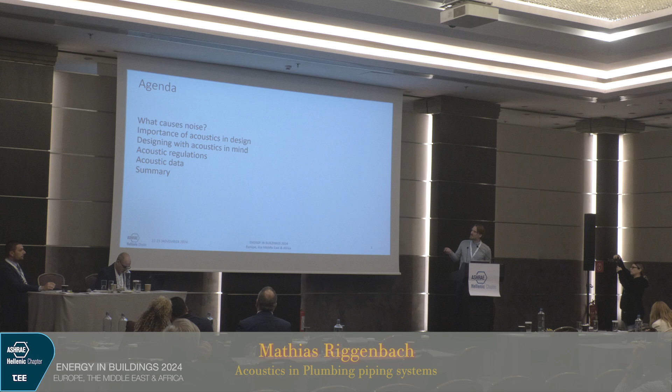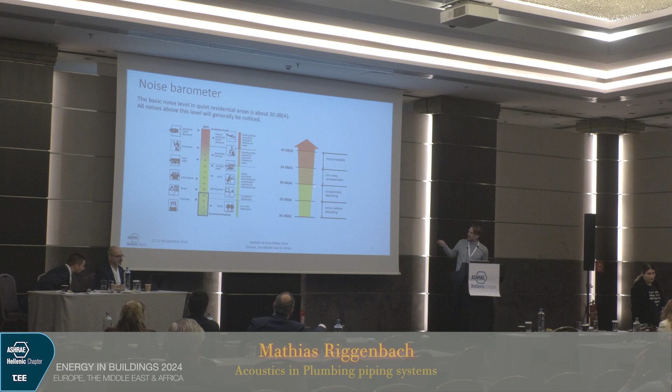I go through the agenda quickly, we'll talk a bit about the basics, and then also we'll go into the acoustic regulations, acoustic data, and have a small summary at the end of the presentation. So maybe as we talk here much about HVAC systems, just to remind about which decibel level we are talking here when it comes to plumbing noise in residential houses, offices and so on. We talk about levels between 20 and 30 dBA. So I guess this is a bit different to the HVAC system, which normally is on a higher scale. So here we concentrate really on levels below or on 30 dBA.

Also, we talk much about the airborne and structure-borne sound. So in the installation room, where we have the toilet, of course we have airborne sound. So if you flush the toilet, we hear the toilet. This is also needed, so we know the toilet works. And the regulations are not according to your own room or your own home. You should not get disturbed by your own flushing of the toilet. Otherwise, maybe you should go to the doctor presentation, you have some other problems. But what is important are the other rooms, so the neighbor rooms, of course not your own rooms.

And then we talk mostly about structure-borne sound. So sound which is going over the structure of the building, especially when we talk about solid installations, so concrete blocks and so on. And when it really goes to acoustics, we are talking mostly about gypsum walls, about lightweight walls, to really make sure we do not have any acoustics traveling to other flats or offices.

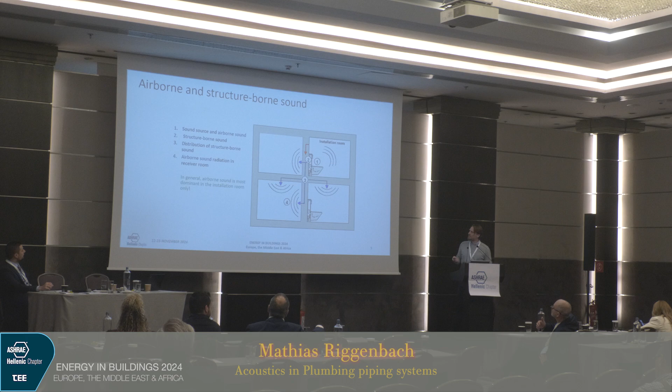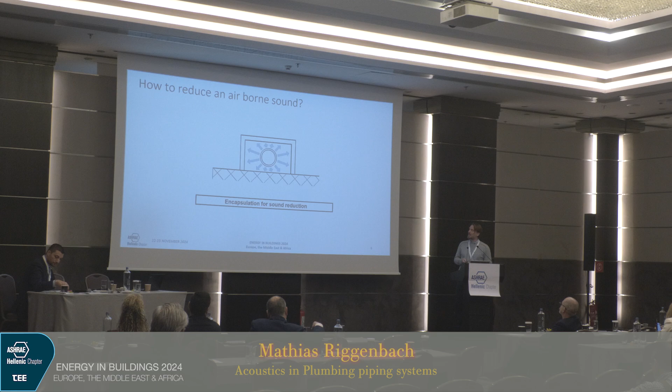How to reduce airborne sound? I think it's quite easy also. We do encapsulation, so we have all the ducts, so mostly anyway the drainage pipes, they don't look so nice. We put them behind ducts, but the main reason is to really keep the airborne sound out of the room, to make sure all the sound produced is not spreading as airborne sound in the toilet.

Then as well, for the solid-borne sound, we have the special brackets. So I think the same on the HVAC system, we have this rubber on the channels which you connect, and you decouple all the installation from the building. And this is actually the same in the plumbing industry. So we really have to decouple all the devices from the building. I always say all the installation should be like floating inside the building. It should never be fixed to the building itself.

Because then we have the big problem of this solid-borne transmission of the sounds. So I'm sure everybody knows if you have, for example, a heating pipe, you hit it on the first floor, and you have no decoupling, no rubber brackets, then you will hear it even from the first floor to the 10th floor. And exactly this we want to prevent.

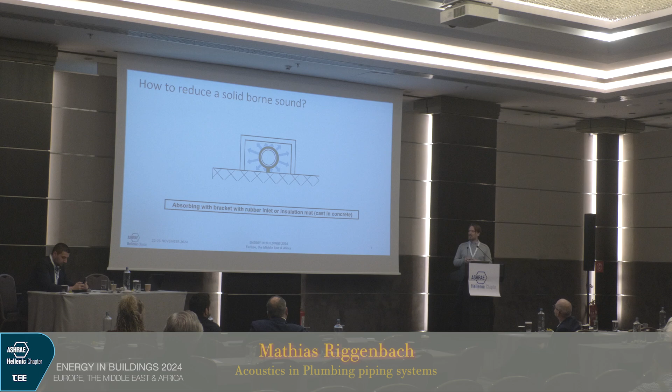Also, what we use in practice, we use in Switzerland, we put the pipes in concrete. It's very special to Switzerland, to the Netherlands. In South Africa they also do it, so they use the HDPE pipes in concrete, and also there we have of course to decouple it, and we do this with the rubber mats. We use the same as a bracket to decouple it from the whole environment.

So what is mostly happening in reality, wastewater noise is neglected in planning. So as well here, if you don't do proper planning, you will have many problems later on, and then it will be very costly to change them. Once you have something behind the duct or even inside the concrete, the pipe, imagine you forgot the insulation, you cannot just put it afterwards. There's a very costly way, with the compressor machines, which you have to use, and this of course is very costly. Or then also the people, when they realize the sounds they are already living in, they will have to go to a hotel or somewhere else to make sure that we can make everything right.

Of course also the pipe is important, but I would say the pipe is maybe 10 or 20% of the whole problem. I will show a bit what you can do to really make sure you get already a good acoustic insulation without using even expensive material.

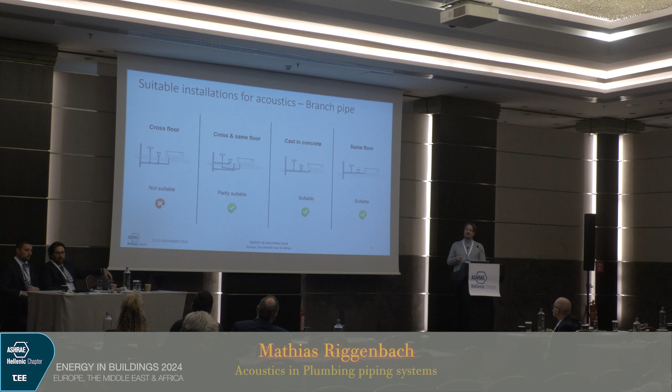So also installation habits are very important. So already there, if you do a proper planning, a proper installation, you can prevent already a lot of acoustics going to the neighbor flats.

Also here, for example, what is done many times wrong, we have installation of a toilet directly to the wall of a sleeping room. Of course, here there are no regulations in your own home, but it's also pleasant when you have a nice installation in your own home. And if you have it to the neighbor, then it's even worse. So we try mostly to do this to the staircase or to another room, which is not relevant for the acoustics. And then also here, for example, a duct which we produce.

So always when you do a duct, actually we increase the noise. You all know, if you are in a smaller room... Here in the big room I need the microphone. If you are in a smaller room I don't need any microphone. We increase the sound. So also here, just with insulation on an L-shaped base, we can break the noise and already make it quite a good acoustic installation.

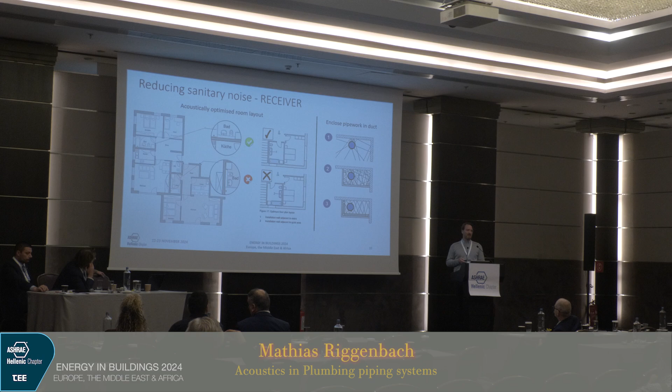So also you see here, planning is crucial when you talk about acoustics. I think in the ASHRAE installation it's exactly the same. So if you do a good planning, a reasonable installation, you can already get very good acoustic results without using expensive pipes or other devices.

Then also the different room types. I spoke already a bit. For example, all the toilets: for a good hydraulic installation, you have the bathrooms on top of each other. And there are no values regarding acoustics to the neighbor bathrooms. Normally in the bathroom you are loud, you're doing something, and then the noise is not really important even in the neighbor's bathroom.

Of course, your living room and especially your sleeping room are the critical rooms, and there you have to take care. So you see here, we always have to think three-dimensionally when you talk acoustics. Because your own rooms, again, they do not matter; well, they have some standards I will show you, but mostly for the general acoustic standards, there's no rule in your own rooms. Of course, if you really want to achieve high acoustic insulation, you can also request this.

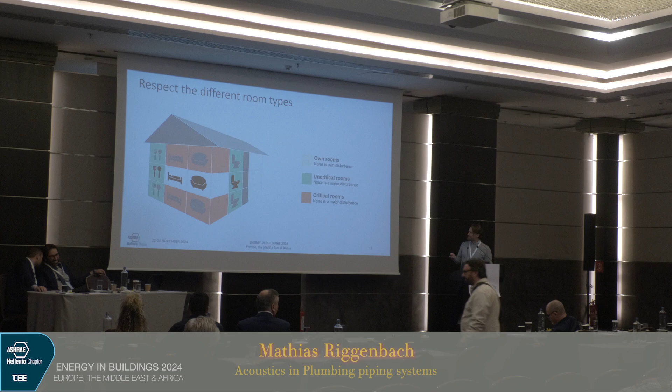Then, what should be used, mainly in the plumbing industry. As I said, people always think about the pipe, so I will show you some examples, some standards which are only about the pipe. But what is important, we always have to think about the whole installation wall. So all the devices which belong to the plumbing have to be considered to do a good acoustic installation.

So as I said, all this wall here is a kind of a pre-wall. You see there's an insulation here, and it should be detached from the normal wall. And this also helps for the statics. Sometimes they use this wall, they break it, they put the devices inside, so it also has additional benefits on the statics of the building. Especially on new buildings, building walls and breaking them afterward doesn't make too much sense. So working with a pre-wall also makes sure you get the best acoustic results.

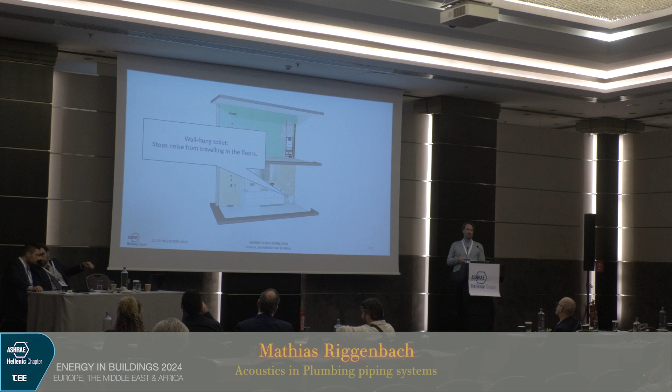As well, the wall-hung toilets here, as I mentioned already, are of course much better than a floor-standing toilet. You keep the noise in your own room and do not send it to the neighbor's room on the lower level. And of course, pipes are still important, but I would say if you have a normal pipe, you make a good layout and a good installation, and you consider all these points, the whole system, you will already get very good acoustic results. And if you really want to achieve the high results, which I show you afterwards, then you also need special pipes, special material, and a more special way of installation.

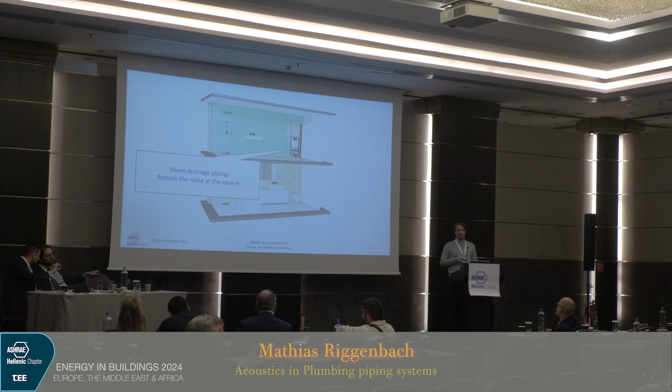Here, just some examples: offsets which we have in the pipe can create a lot of noise. For example, a 45-degree offset can already create +9 decibels, which is quite a lot when we talk about acoustics. If we go to a 30-degree offset, we have only 7, and if we go for a 15-degree offset, we are only at +5 decibels. So best is not to do any offsets, also from a hydraulic point of view, but more from the acoustic point of view.

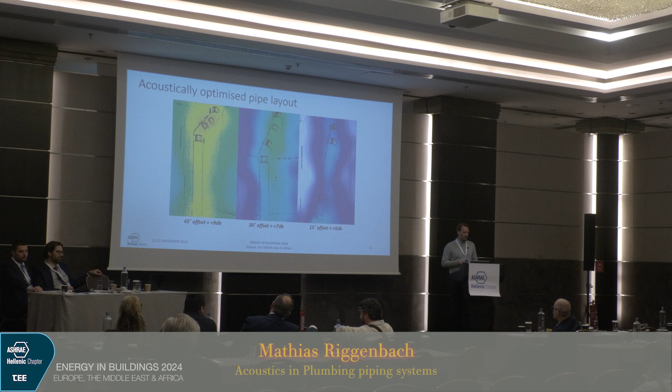Responsibilities, also a big point. Who is responsible for the acoustics in the building? There are the engineers, and of course the architect who makes the preliminary layout. So I always say the escalation is already starting here. If the architect makes a bad layout of the building, for all the others it will be very difficult to repair this bad design. And many times I see architects are not aware of all these measures they can take, because it was not really taught to them in school. And this is something I think is important on acoustics, to talk to the architects and show them how to do it right.

And maybe also to explain a bit how it started in Switzerland, why acoustics got important. It was mainly because of the insulation of the building. Again, I come back to the general topic of the conference, decarbonization, difficult word. We started to insulate and insulate more. I saw this morning the colleague showed an insulation of 6 centimeters. In Switzerland, already 20 years ago, we started to do 20 to 25 centimeters of insulation on buildings, because we could see that with this input, we can reduce the carbon output very drastically. Of course, there's a limit. We checked how much really makes sense, and I would say between 20 and 25 centimeters of insulation makes sense.

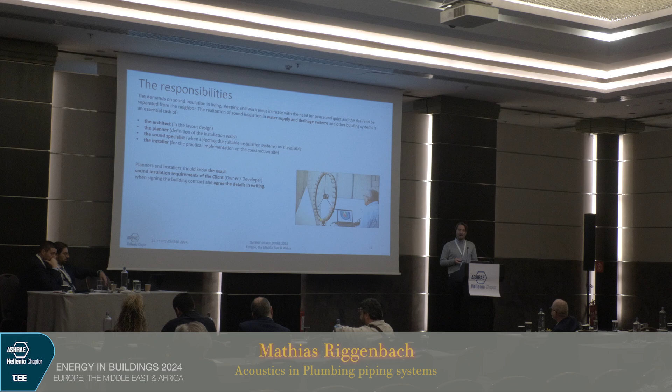And also very important, we all know, everything fails with the installation. If installation is not done well, you can have the best product, but if you don't install it well, all the benefits will be lost. So I see I have to speed up a bit.

So here I show you some standards. You see German standard, Swiss standard, Austrian standard, we have a UK standard. We have also in Israel a standard, but other European countries either use the German standard, which is mainly used also in hotels where it's most important. And there's the EN 14366 standard. And it's very important here, on these standards we define acoustic values within buildings.

So very easily said, when you are having a nice dinner with your family and the neighbor is flushing the toilet, we measure the acoustic value which you hear in your building. And this is what matters at the end of the installation. So this is important: I want to hear below a certain value, to have a comfortable life, to not get disturbed by the neighbor. I would say this is the important point.

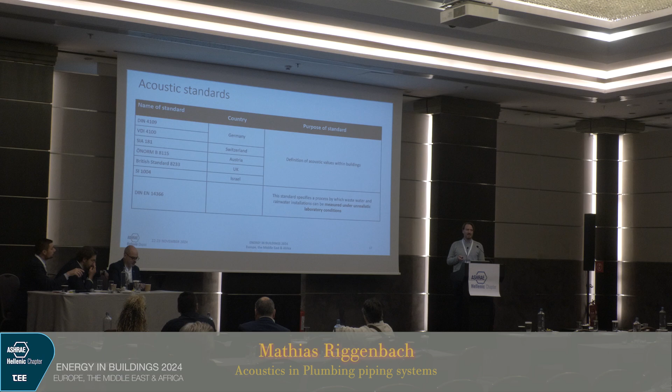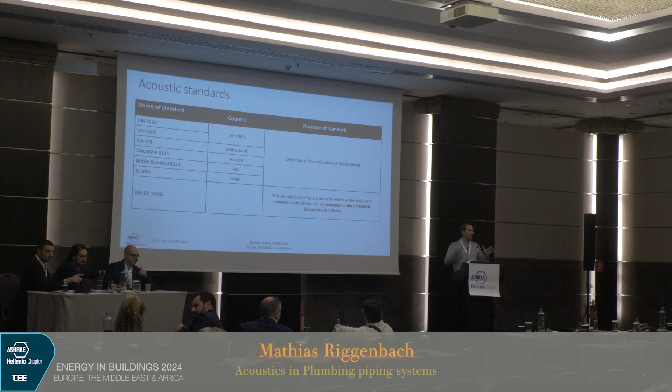Unfortunately, this standard, the 14366, is mainly used in the Middle East and African region. Here they measure some standard installation with wastewater in the Fraunhofer Institute in Germany. I'm sure you all know the Fraunhofer Institute. And this is more just to differentiate some pipes, so they only measure some pipes. It's not really an important value for the end user who is, for example, buying an expensive flat. He doesn't care what they measure in Germany somewhere in the laboratory.

Here, an example also of the British standard. Also here, it's not really much defined. We have, of course, values here from 7 to 23, then also in the night some other values around 35 to 40 dBA. But what you can read here, and what is a bit the missing part in most of the acoustic standards, it's not giving values for soil waste pipes.

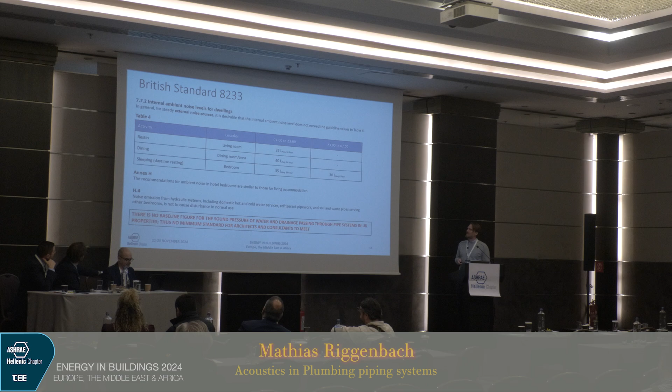You see here in H4, for example, it's only written noise emission from hydraulic systems, blah, blah, blah, other bedrooms is not to cause disturbance in normal use. So what is disturbance in normal use? Everybody has a different perception of disturbance, and that's why we need some regulation on decibels. We need exact values, not just some vague interpretation from any standard. So we really need to have this clear. So the British standard is a bit difficult.

I show you, for example, DIN 4109. Here it's clearly defined for living spaces and bedrooms. Diagonally, you should be at 30 or lower, for classrooms and office spaces 35 decibel A. And you see for rooms in the adjacent area there are no requirements. So this is the 4109-1, and then we have the higher levels for the 4109-5, where you go even to the lower level. This standard you have to apply in all the houses. This one here is optional.

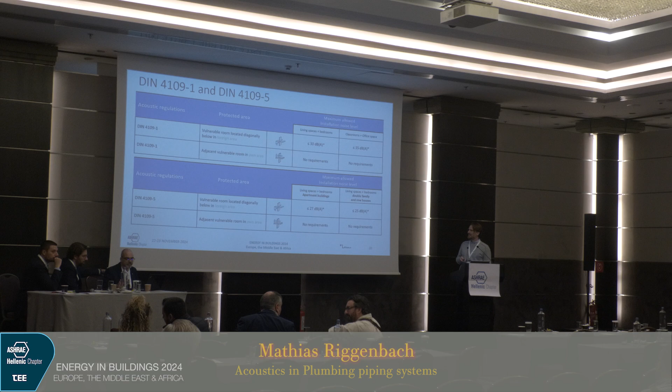If you say I build a very prestigious property, I want to take this into the contract, then you have to define these levels. So the DIN EN 14366, as I said, is more for defining installation of pipes. I will not go through all the points here, as there's no time. You see here in this institute in Germany, they put in the water on the second floor, and then they measure it 2 floors below.

So here we get really low values, even below 20 decibels, which are not relevant if you make an installation in this room here and then measure, for example, the diagonal noise. Also here they use some special installations and some very thick walls, and this is just not reflecting the reality. It's what they do in a laboratory, and of course you get some values, but they are not suitable for installation in reality.

So what should be done according to DIN 4109? Taking a real installation, flushing the toilet, the loudest device, and then measuring directly in the different rooms which are near to you. Because those are the values which are important when, for example, after you buy the flat, you make a measurement, you want to see this value on your measurement equipment, and you don't want to see any value from a German laboratory which was measured under laboratory conditions.

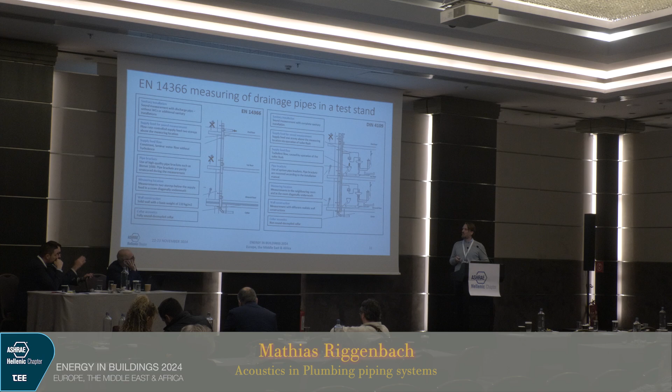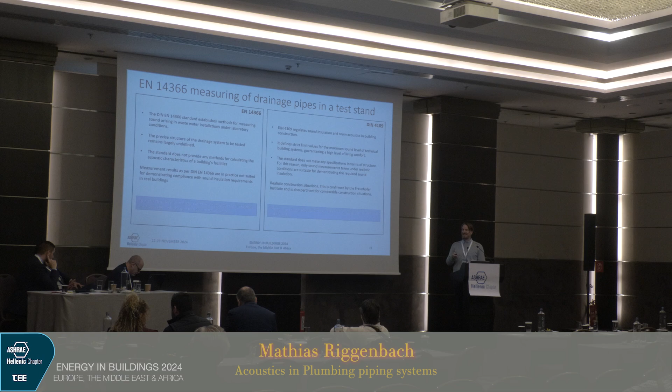So here is the difference. You see EN 14366 is, let's say, a cost-effective way of keeping customers happy, not giving them practical values. And then DIN 4109 is a rather expensive way. You have to build up many different situations, so it's not a predefined situation in a laboratory. Many different situations which you can have in your country, for example, build them up, making measurements, making certification, etc. So this one here, of course, helps the industry. This one here helps a bit to keep the cost low, which is not in the interest in the end of the end owner who buys property and gets a certain value guarantee.

So there are measurement data for common situations here. You see, for example, an example of a drywall system. All the devices are built up. Everything is clearly defined. How is the installation? How it will be done also afterwards on the building side. And then you get a measured value up to 25. If you are below, it's okay. You should just not be over 25.

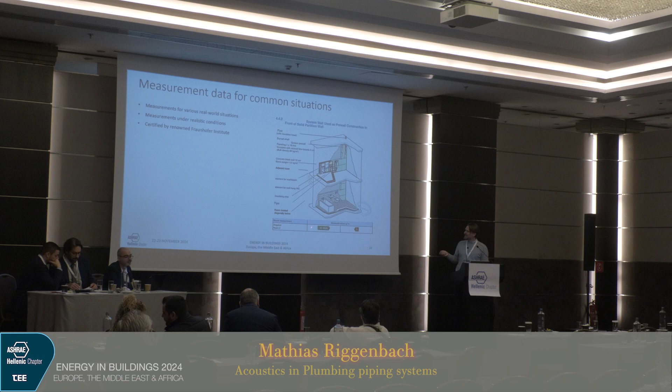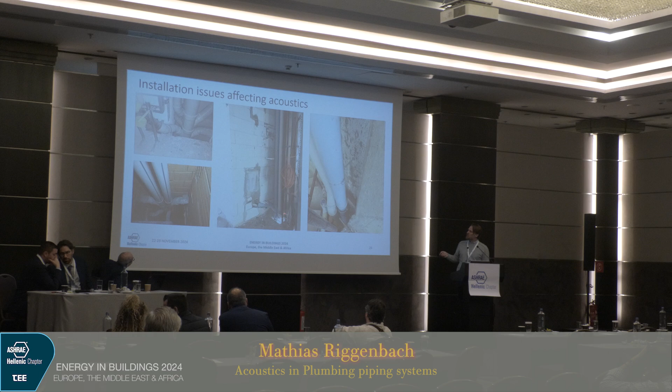Installation, as I already said, mostly it looks like that, unfortunately, when you have not done it right. Of course, also here it's important you decouple everything from the building. You see, for example, this metal bracket here, direct contact to the wall, so the sound will be spread over the whole building. Also here, there's no insulation between, so all the sound will be spread over the full building.

So I come to the summary. Nobody cares about drainage until it becomes a problem. So you do the installation, somebody goes to live in, starts to complain, and then it gets expensive. Design with acoustics in mind from the outset, that's the advice I can give. If you do that, you can be sure you will not have any problems with the customer afterwards.

Ensure good installation practice, and if you get this EN certificate, make sure that if they promise you some low levels below 20 dBA, you get this signed from the planner or whoever offers you these low values, because we know, I'm sure you also know, to achieve below 20 dBA in a building is very difficult, not to say impossible. So that's it, in a very short way, a bit of an excursion to the plumbing industry and the challenges we have there when it comes to acoustics.

No, the problem was at one point it doesn't make sense to put more insulation. It's a ratio of investment and return. That is the problem. Sorry, there was a misunderstanding. So we went to 30, 35, 50. You know, also for example the water heater. There's a certain insulation which makes sense, and the more you put, at one stage it doesn't make sense. You don't save much more. That's what I wanted to say.